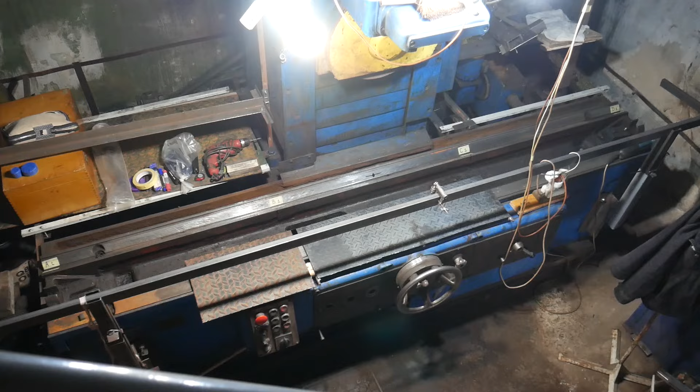Hello. I am continuing the repair of the 3D722 surface grinding machine. Without watching the previous episode, the logic behind my actions might be unclear. Please watch the previous episode if you want a complete understanding.

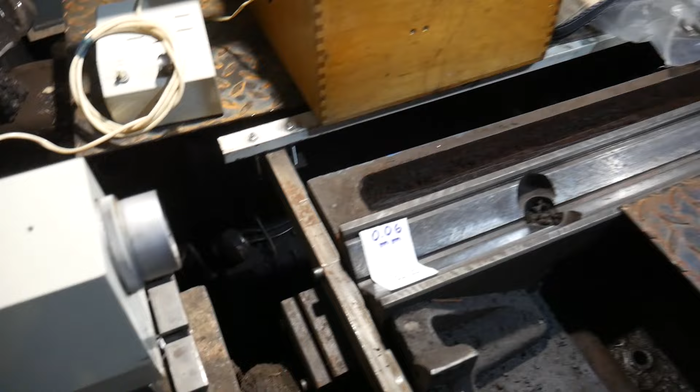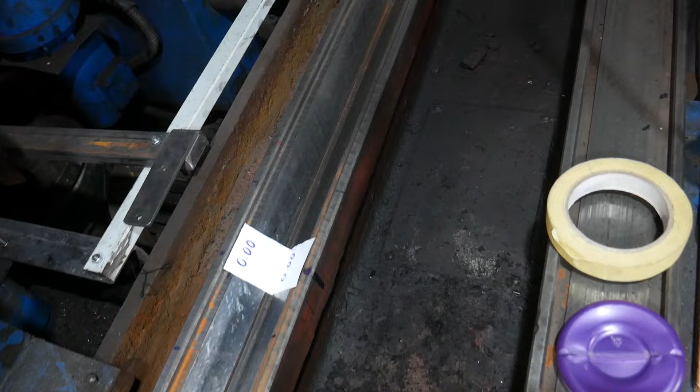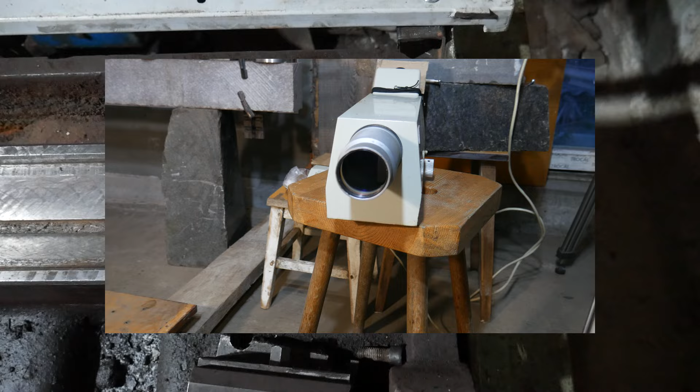I am repairing a pair of linear movements 3 meters long using an autocollimator as the key measuring tool. The autocollimator will ensure the linearity of this guideway. It's quite challenging to imagine a 3-meter straightedge, even more so to work with it, especially without assistance. While it's not impossible, using an autocollimator allows me to achieve the goal more easily and with higher accuracy.

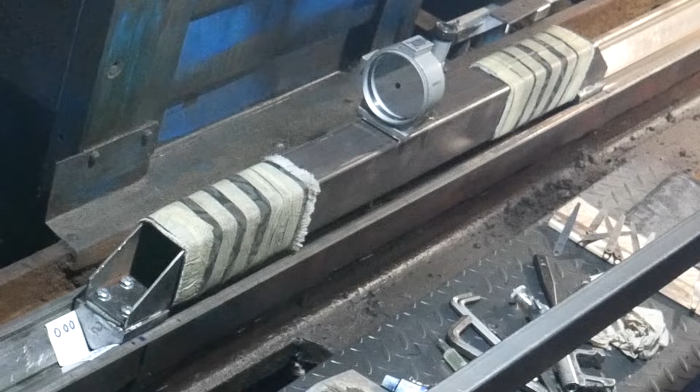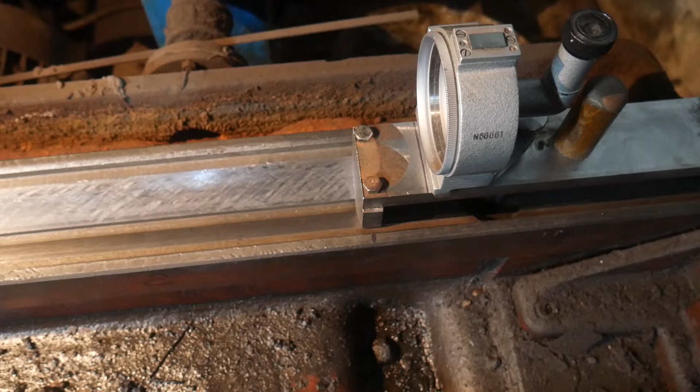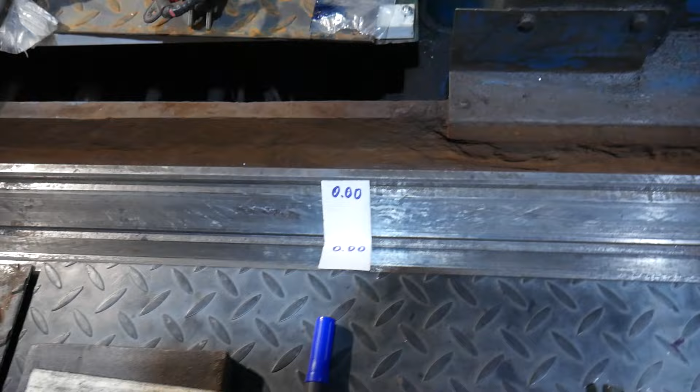I will need a support for the autocollimator mirror about 1 meter long and a straightedge bridge also slightly over a meter long. I could use, for example, a half-meter support for the mirror and a half-meter straightedge, further easing the strain on my back and arms. However, I have decided that handling meter-long accessories is within my capability. After all, taking measurements in 3 positions will be slightly more accurate and simpler than in 6 positions.

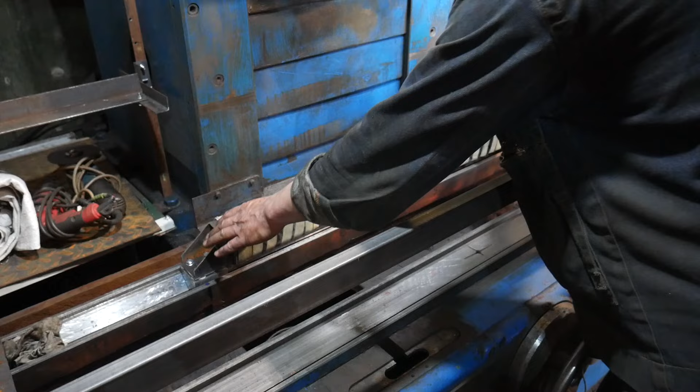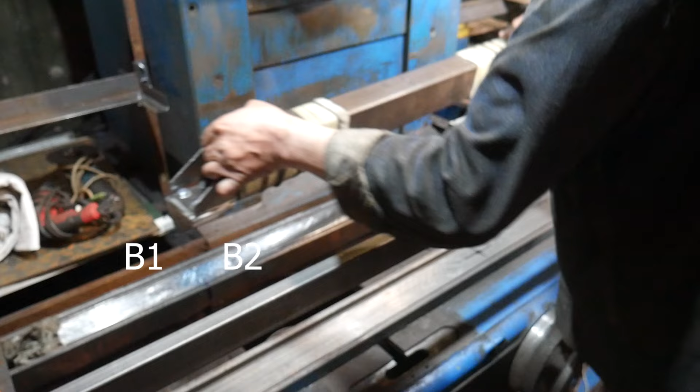In the previous episode, I preliminarily created base segments approximately 5 centimeters long on the guideway, located half a meter to the left of the center, which I called B1 and B2, and similar segments half a meter to the right of the center, named C1 and C2.

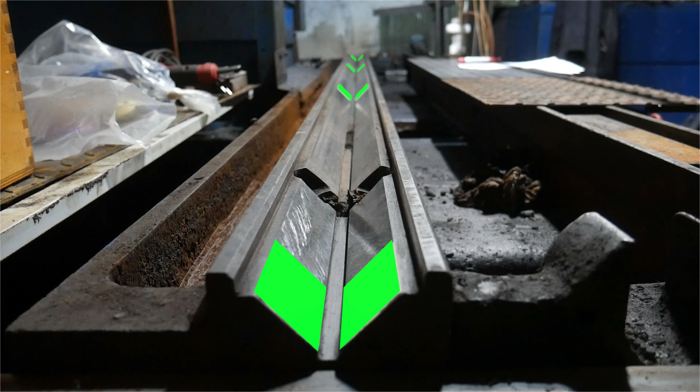These segments, having been scraped to match the prisms of the autocollimator mirror support, which have precise surfaces, lie on 2 imaginary ideal planes. I named these planes alpha and beta. These segments will serve as beacons during scraping.

Subsequently, similar segments will be created at the edges of the guideway, relying on the autocollimator's readings. I named these segments A1, A2, and D1, D2. Together with segments B1, B2, and C1, C2, they will bring the guideway strips to the correct linear form by removing the protruding material between these beacon segments.

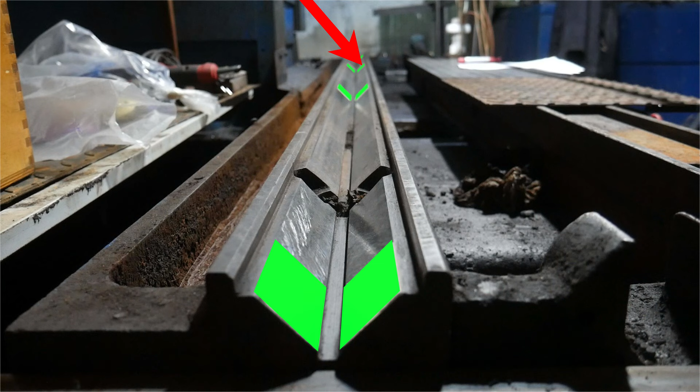The protruding material will be identified by paint marks from the meter-long straightedge bridge. This scraping process will culminate in reaching the alpha and beta planes along the entire length of the guideways.

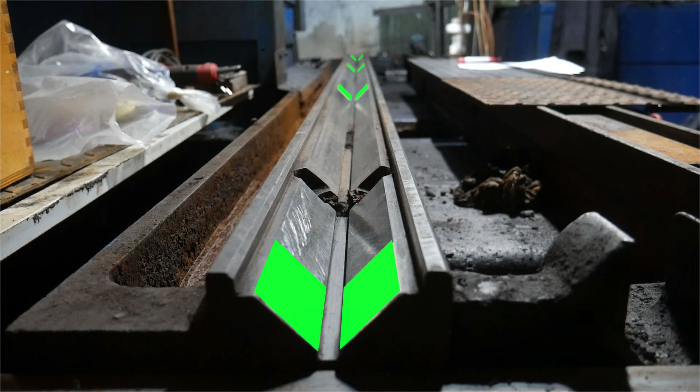Now, the logic of the repair poses the next question. I have already created the beacons, so the imaginary planes have taken their positions in space. But how do their positions relate to the vertical guideways? How close are they to a 90-degree angle?

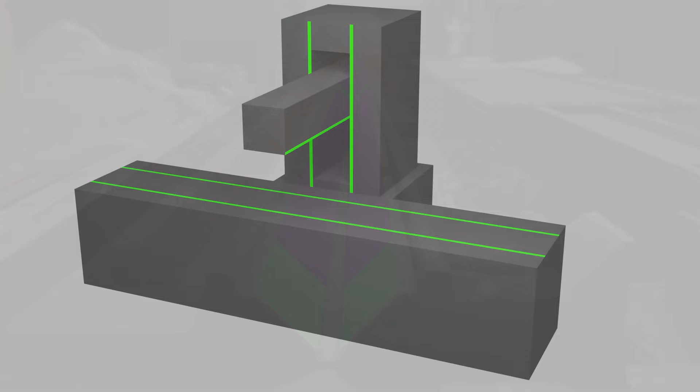This is important, though not crucial as it would be for a milling machine, but still significant. Having the answer might lead me to adjust the positions of the alpha and beta planes by deepening the relevant beacons from the B or C groups. As a result, I will approach the correct 90-degree angle relative to the vertical guideways without making unnecessary efforts, as it is equally easy for me to cut more from either the right or left side of the guideway, tilting them towards a position closer to a 90-degree angle. Thus, the overall workload will not change significantly and may even decrease.

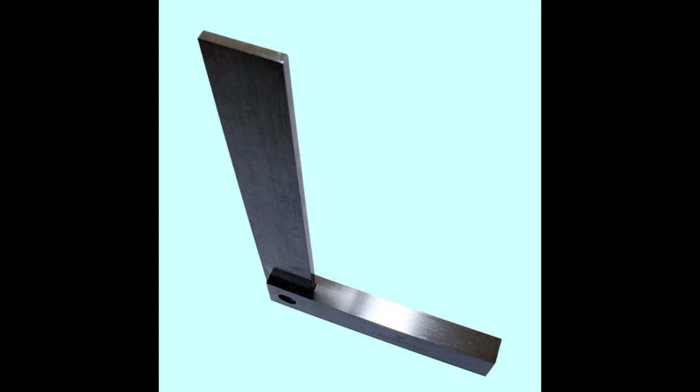So, I am measuring how precisely the horizontal feed, currently still imaginary, passing through segments B1, B2, and C1, C2, aligns with the vertical feed. Here's how I will perform this procedure. I need a reference angle of 90 degrees, with one side measuring at least a meter, as the distance between the supporting segments B1, B2, and C1, C2 is 1 meter.

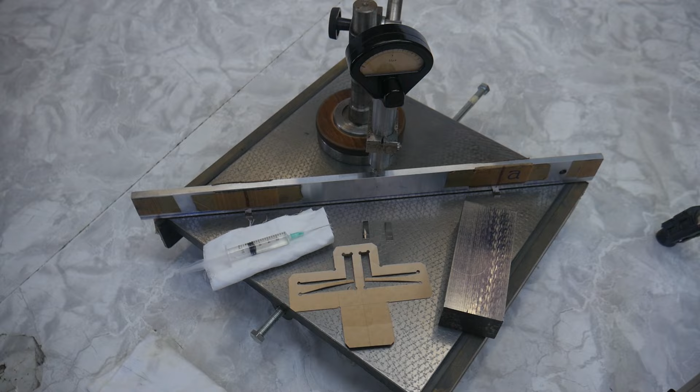I currently do not have such a reference angle. However, this is not a problem. I have the necessary minimum, a reference straightedge of sufficient length, verified and very accurate, which, again, is not a necessary condition since accuracy beyond 0.01 mm is unlikely to be needed here.

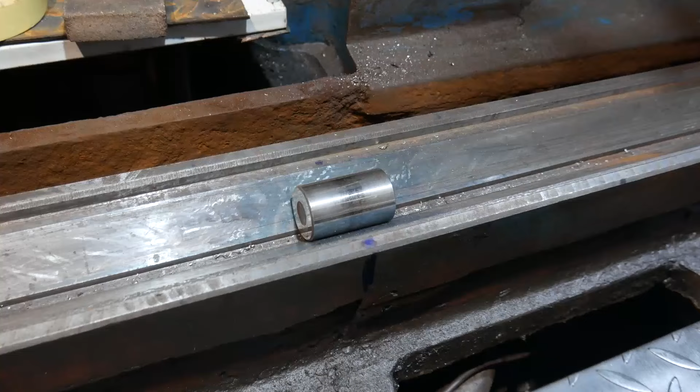I have two supporting cylinders, formerly bearing rollers, whose diameters correspond to the guideway size, and their geometry is accurate enough to be used as supports for the square on sectors B1, B2, and C1, C2.

I also have an old reference angle, which is not accurate and has been heavily used, especially by welders. But its longer side is exactly 1 meter. It will serve merely as a frame for mounting my reference straightedge and two supporting cylinders. If I didn't have it, I would have simply welded something similar from two square tubes, which would be sufficient.

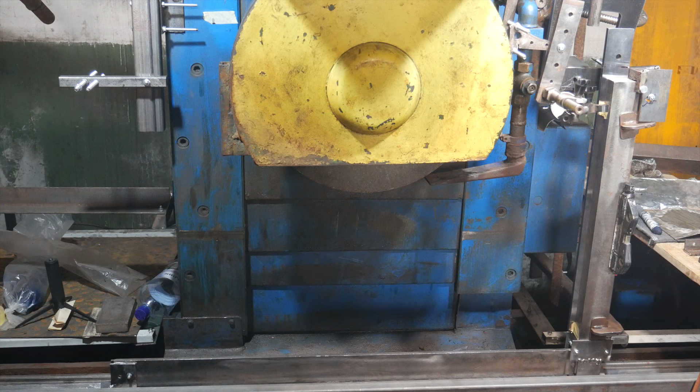If I had an accurate reference angle of 90 degrees, one measurement would suffice to understand the vertical feed's position relative to the horizontal feed. Since such an accurate angle is unavailable, two measurements instead of one will compensate for the lack of a precise square by using the second, opposite measurement, thus providing accurate information about the angle between the longitudinal and vertical feeds on this machine.

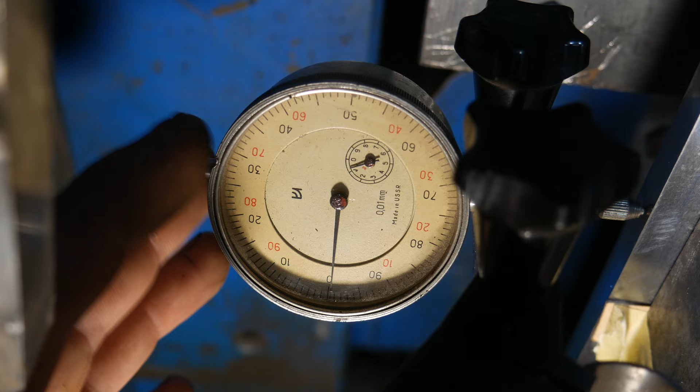Now, let me demonstrate the step-by-step methodology. I will glue the supporting cylinders to the frame of the angle to create supports at points B1, B2, and C1, C2 on the guideway line.

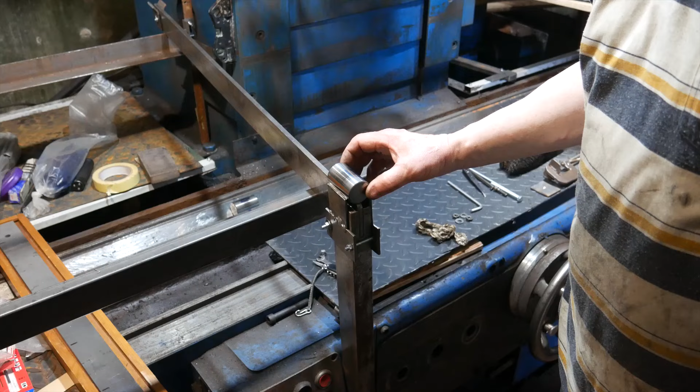To apply glue and ensure sufficiently reliable fixation of the supporting cylinders, additional pads were made for the angle frame. The supporting cylinders have some freedom to adjust their positions while the glue is still plastic, orienting themselves to the support points B1, B2, C1, C2, ensuring their proper positioning during adhesion.

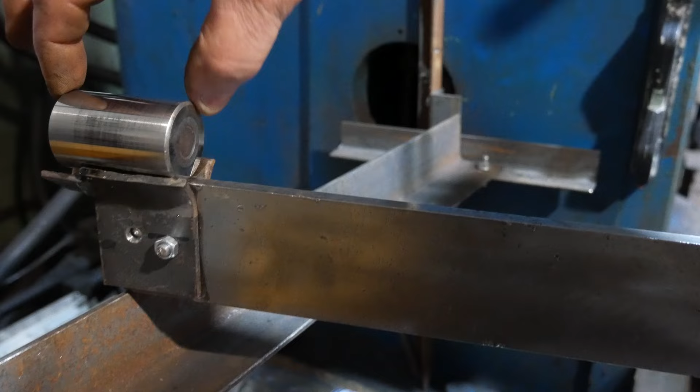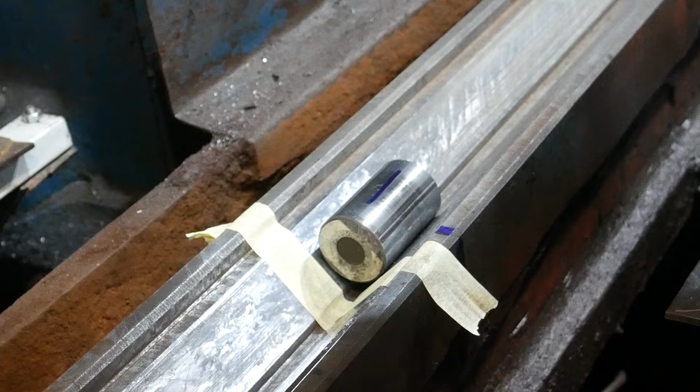I am not concerned about the polymerization process of the epoxy glue causing shrinkage. Shrinkage has certain characteristics, which I have separately studied, and I will not delve into this here, but I have grounds to believe that this characteristic of epoxy glue will not affect the positioning of the supporting cylinders, allowing them to fully interact with the supporting sectors B1, B2, and C1, C2. Therefore, I use epoxy glue and attach the supporting cylinders to their respective places.

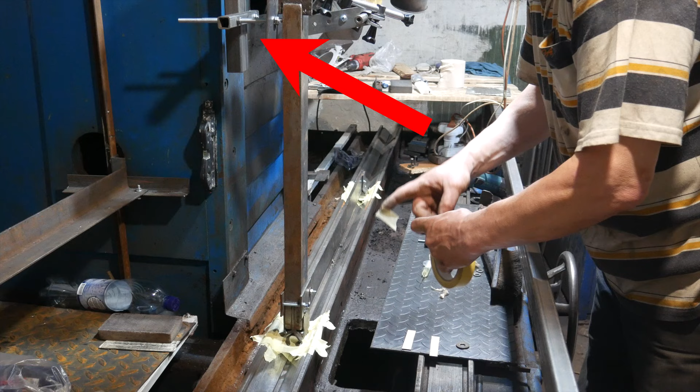Thus, my angle gains supporting legs. I have assembled a simple supporting structure that secures the angle in a vertical position.

The next step is to attach my reference straightedge to the vertical arm of the angle. Two clamps will facilitate this operation.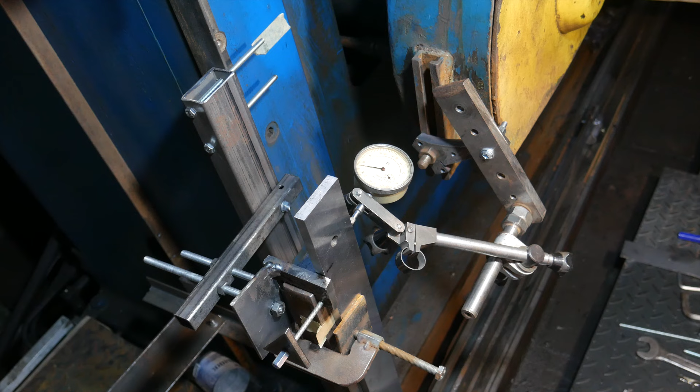I created the possibility to finely adjust the angle of the reference straightedge using a support screw. I quickly reached the state where the straightedge became parallel to the vertical feed. This is confirmed by the indicator needle staying at 0 while moving the carriage over its entire range.

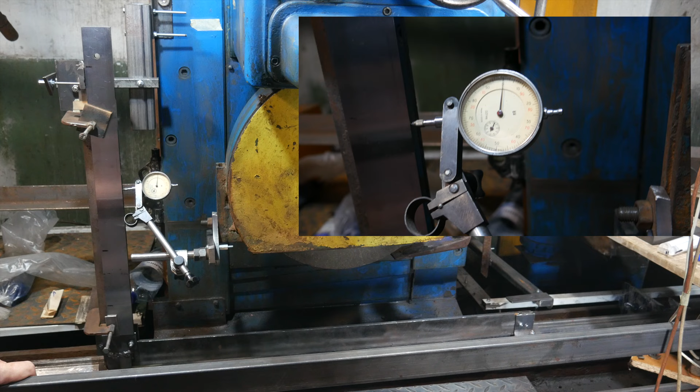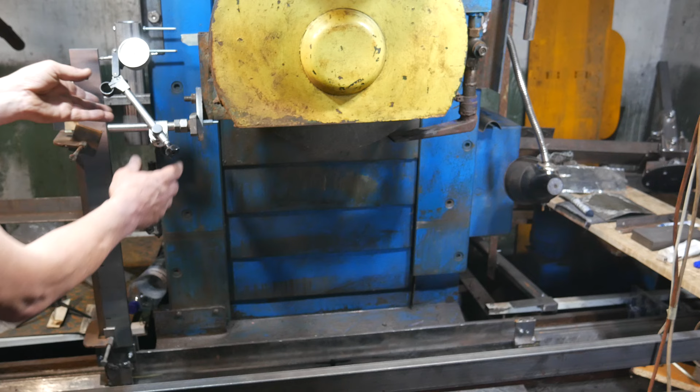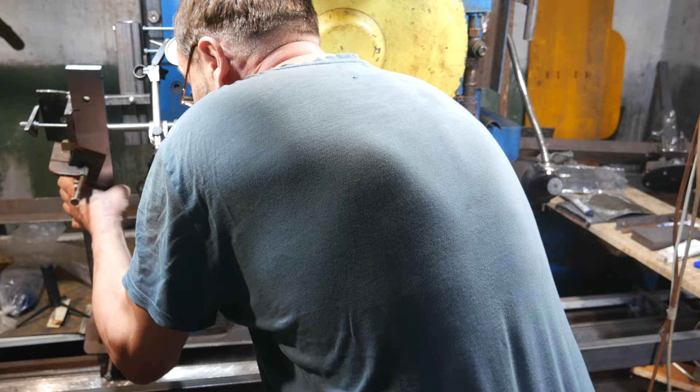The next step is to carefully rotate the angle 180 degrees. Secure the indicator for the second measurement accordingly.

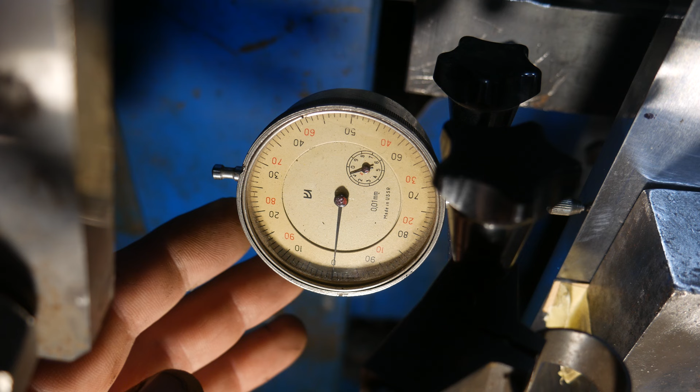Now, move the carriage downward, and everything will become clear regarding the angle between line B1, B2, C1, C2, and the vertical feed.

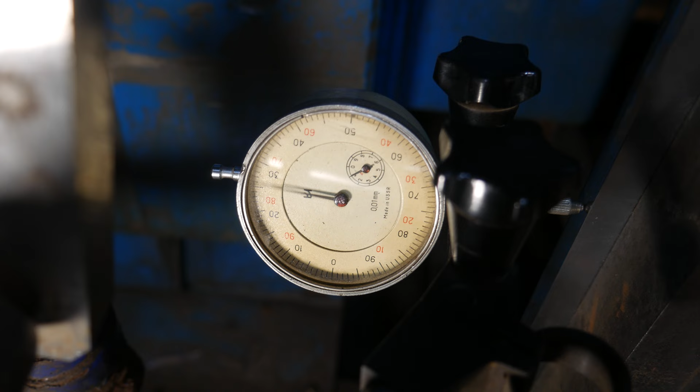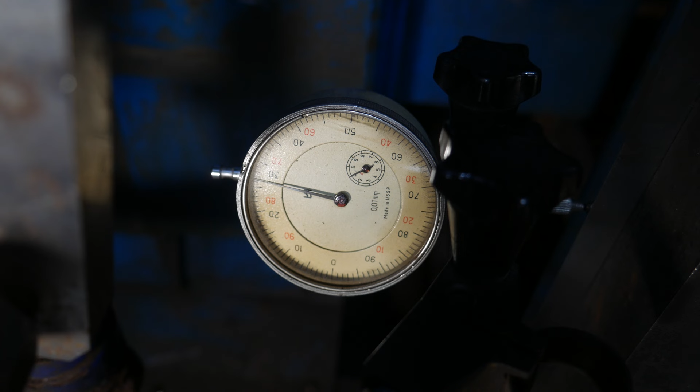The indicator needle showed a movement of 0.26 mm when the carriage traveled down 300 mm. Since this is a double measurement, the result must be divided by 2. Thus, here it is, the inclination of the vertical feed: 0.13 mm over 300 mm.

Conclusion: if possible, during scraping, I should cut more from the left side of the guideway. This way, I will not only create straight guideways but also bring the angle between the horizontal and vertical feeds closer to 90 degrees, improving the overall geometry of this machine.

If it were a milling machine, I would have to achieve a full 90-degree angle, but on a surface grinder, I am satisfied with getting closer to it, which is quite sufficient. Agreeably, it is undesirable to move away from this angle during the repair, which would not have been ruled out without these measurements.

To ensure I haven't disturbed the assembled angle when turning it 180 degrees, and to confirm that this measurement is indeed accurate, it makes sense to verify it with a third measurement by returning the angle and the indicator to the initial position. If parallelism is observed again, I can be confident in the obtained result.

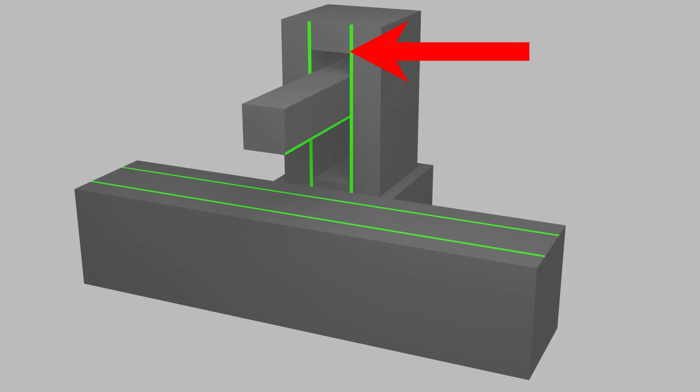I must note that in this feed, the carriage moves on rollers, so I can hope that its geometry is well preserved. The first measurement is conducted at the upper part of the carriage travel. The indicator has a resolution of 2 microns.

In this part of the guideway, minimal wear is expected. Indeed, there is no backlash.

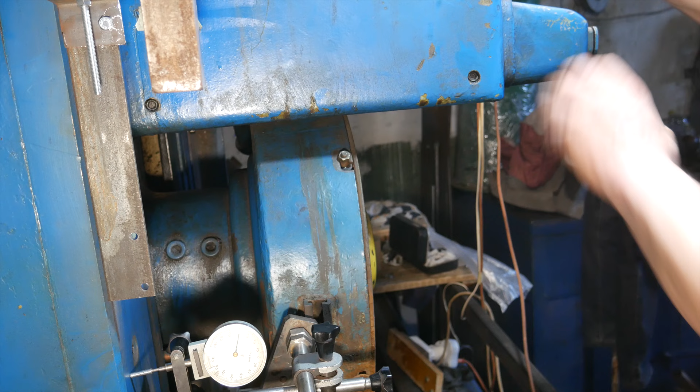Lowering the carriage. Still no backlash. Lowering the carriage further.

Approximately here, maximum wear is expected. Indeed, slight backlash appeared. But it is close to 1 micron.

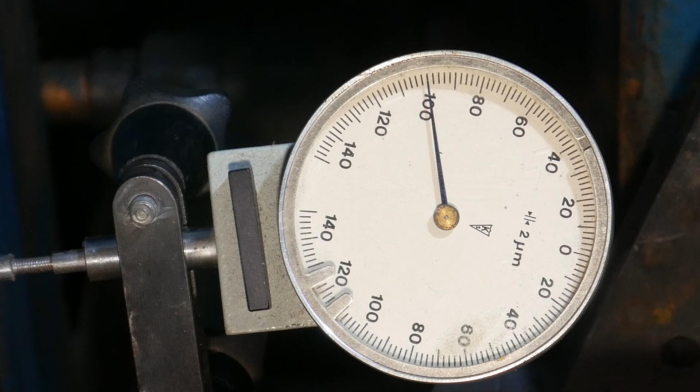The condition of the vertical feed, which operates on rollers in this machine, is good. The condition of the spindle's cross-feed is significantly worse, as expected. But this is not a big problem, which can be controlled and, overall, can be analyzed later.

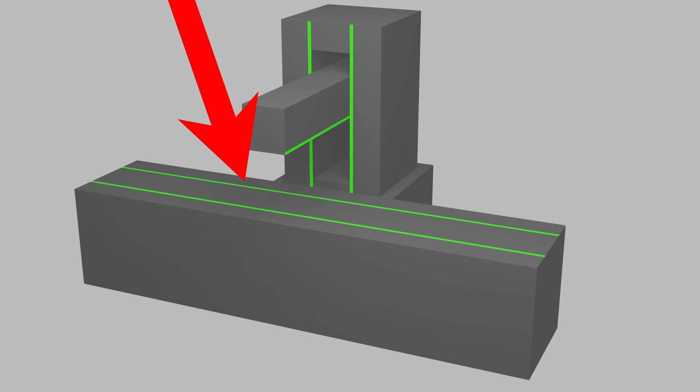So now I know the inclination of the vertical feed relative to the supporting sectors B1, B2, and C1, C2. Based on this data, I need to find the optimal spatial position for the alpha and beta planes, a position where I can create straight guideways by removing the minimum amount of cast iron from the machine's body while also approximating the vertical feed's angle to 90 degrees.

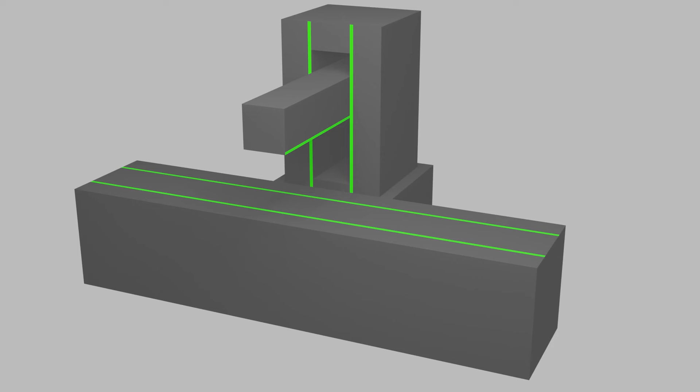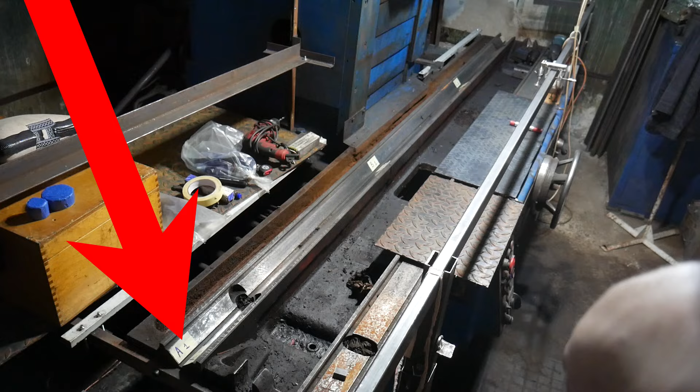In the next episode, according to the repair plan, I will adjust the sectors B1, B2 and create sectors A1, A2, and D1, D2. All of them will be aligned along the alpha plane and along the beta plane.

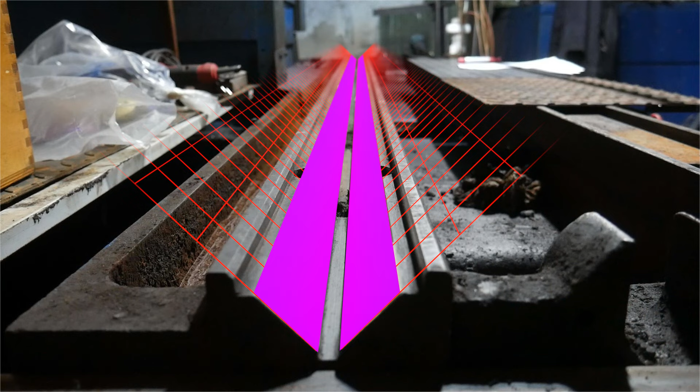Right now I'm leaning towards making the guides completely straight. Although the instructions for this machine indicate the desired gradual reduction downward by 1/100th of a millimeter of the guide in its center, taking into account its expansion from heating in operating mode. But there is still time to think about it and make an informed decision.

I am pleased with this stage of work. Of course, there is a lot of work ahead, but if I can handle it, then I will get from the machine excellent accuracy and smooth operation, which it certainly deserves.

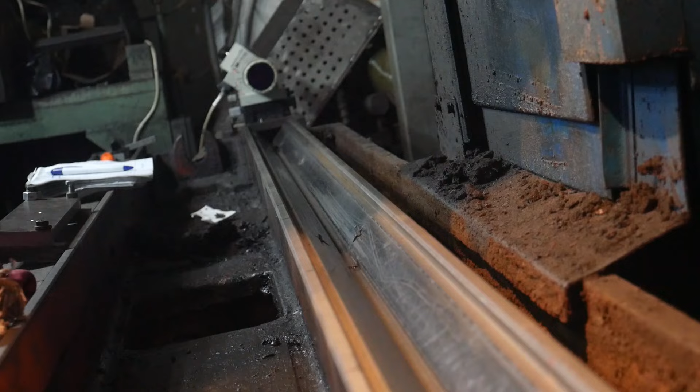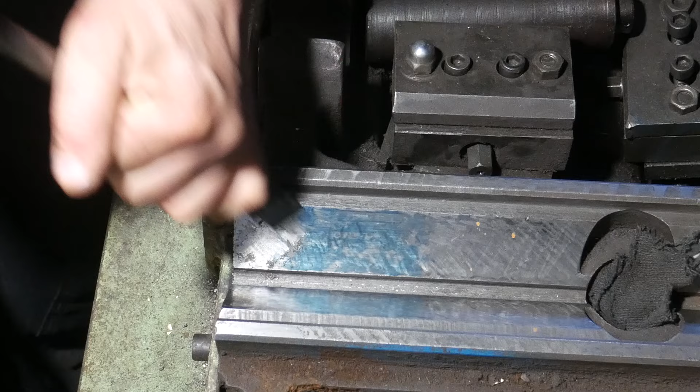I am pleased with this stage of the work. Of course, the hardest part is ahead, but if I manage it, I will receive excellent accuracy and smooth operation from the machine, which it certainly deserves.